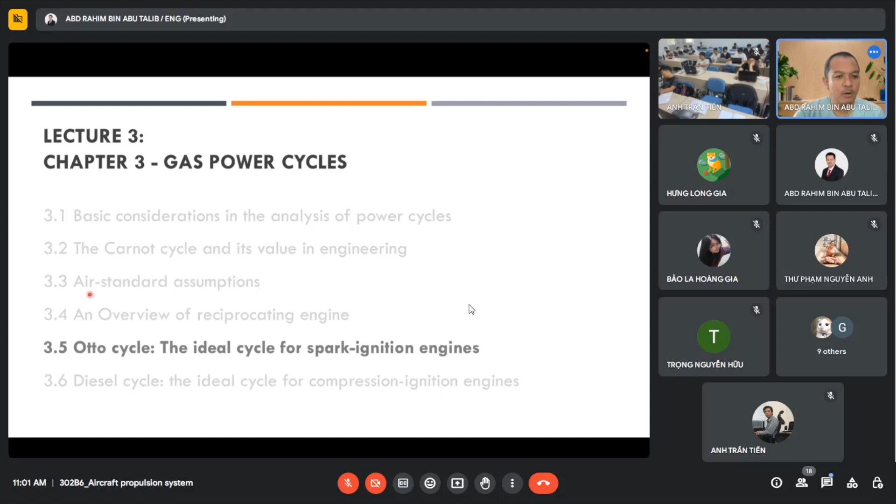In chapter 3, gas power cycles, we have already looked into the topic on analysis of power cycle, and then we looked into the Carnot cycle and its value in engineering. We also continue on air standard assumptions. There are a few assumptions that you need to understand, and I would highly recommend you memorize the standard air assumptions, so that whenever you come across any problems in gas power cycle, you can apply all the air standard assumptions with reasoning.

And before our break just now, we already looked into an overview of the reciprocating engine. From there we learned a few terminologies that are very important for us to apply in the following subtopic. So next we want to go into the Otto cycle. This is the Otto cycle, the ideal cycle for spark ignition engines.

The Otto cycle is the ideal cycle for spark ignition reciprocating engines. It is named after Nikolaus A. Otto, who built a successful four-stroke engine in 1876 in Germany using the cycle proposed by Frenchman Beau de Rochas in 1862.

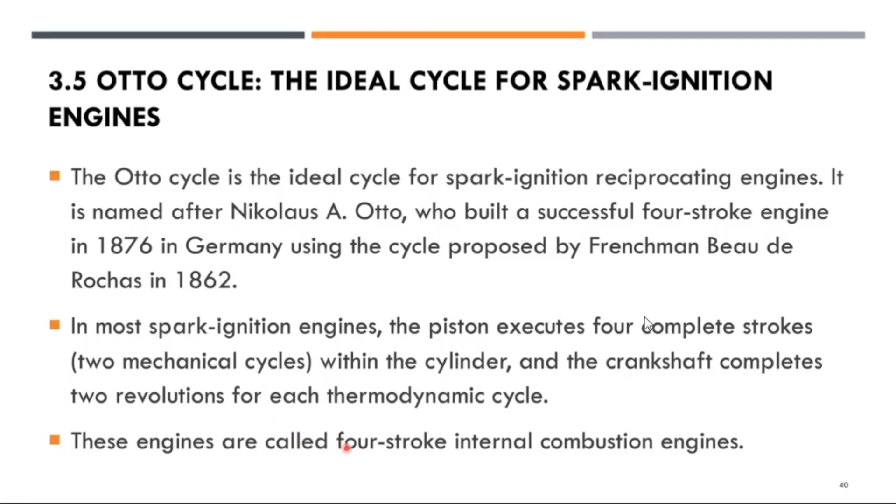This guy, Mr. Rochas, already proposed the cycle in 1862. However, Mr. Otto successfully made it realistic in 1876. Basically, in most spark ignition engines, the piston executes 4 complete strokes, 2 mechanical cycles within the cylinder, and the crankshaft completes 2 revolutions for each thermodynamic cycle. So these engines are called 4-stroke internal combustion engines.

Later on we are going to look into how it looks like. I think it's better we try to understand the process. Initially, both the intake and the exhaust valve are closed, and the piston is at its lowest position, BDC. I think you can recap what BDC is. During the compression stroke, the piston moves upward, compressing the air-fuel mixture.

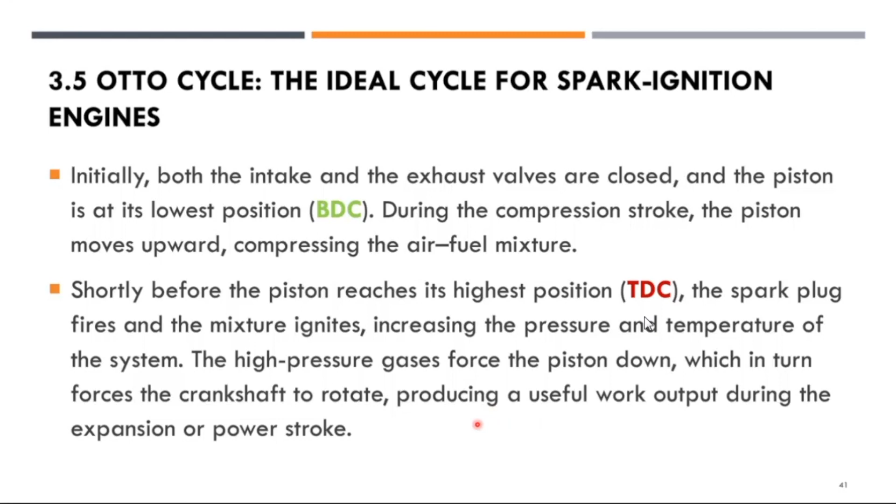Shortly before the piston reaches its highest position, the TDC, the spark plug fires and the mixture ignites, increasing the pressure and temperature of the system. The high pressure gases force the piston down, which in turn causes the crankshaft to rotate, producing useful work output during the expansion or power stroke. So that's what happens in this particular movement, the compression stroke.

The piston moves upward, and then there's a spark there to ignite, right? And then the exhaust stroke movement and the intake stroke movement.

Let us just try to read through. Toward the end of the expansion stroke, the exhaust valve opens and the combustion gases that are above atmospheric pressure rush out of the cylinder through the open exhaust valve on top of the cylinder. This process is called exhaust blowdown, and most combustion gases leave the cylinder by the time the piston reaches BDC, and the cylinder is still filled with exhaust gas at lower pressure at BDC.

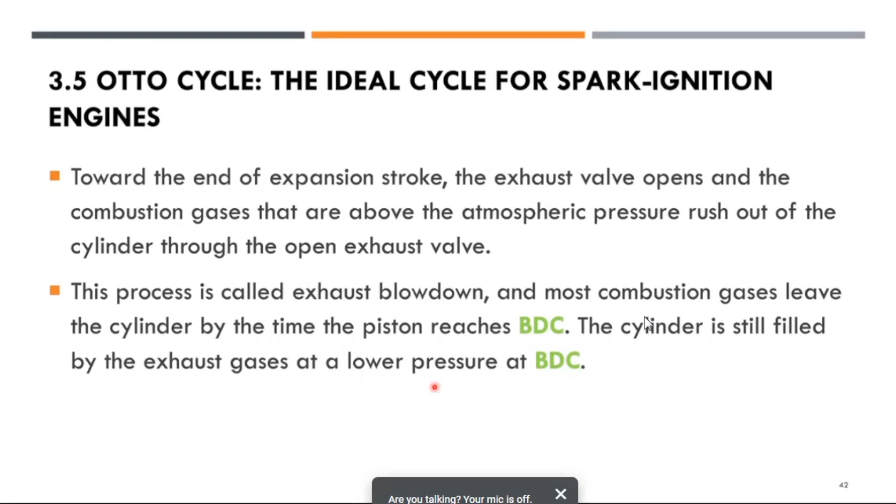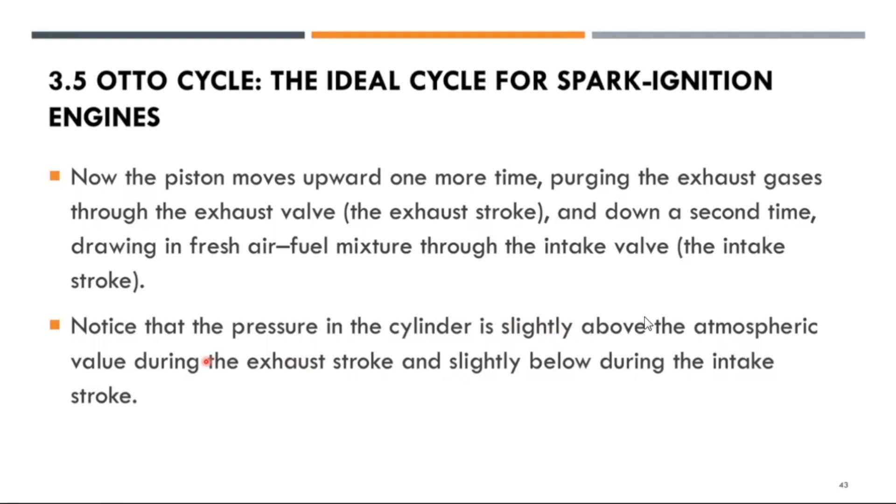Now the piston moves upward one more time, purging the exhaust gas through the exhaust valve, and down a second time, drawing a fresh air-fuel mixture through the intake valve. Notice that the pressure in the cylinder is slightly above the atmospheric value during the exhaust stroke and slightly below during the intake stroke, as shown over here.

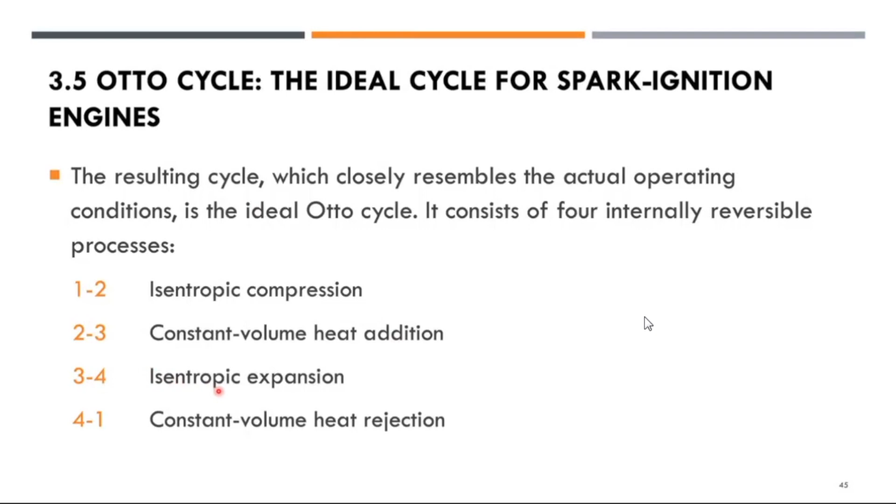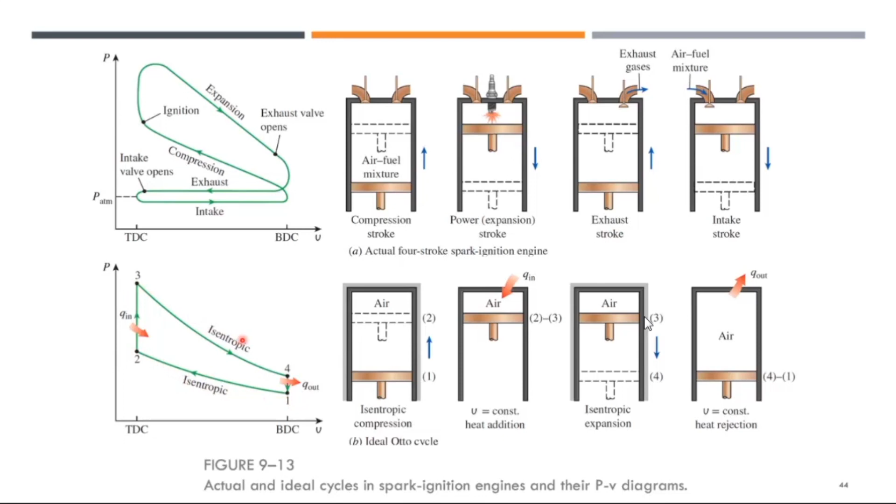The resulting cycle, which closely resembles the actual operating condition, is the ideal Otto cycle. It consists of four internally reversible processes: 1 to 2 is isentropic compression, 2 to 3 is a process of constant volume heat addition, process 3 to 4 is isentropic expansion, and 4 to 1 is constant volume heat rejection. You can see 2 to 3 is Q in, 4 to 1 is Q out. Process 1 to 2 is isentropic compression, 3 to 4 is isentropic expansion.

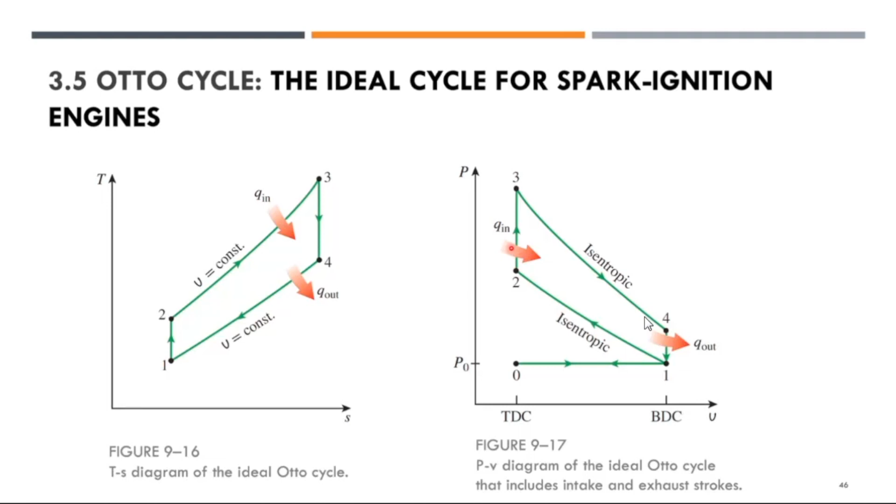This is the TS diagram for the Otto cycle, 1, 2, 3, 4, where the volume is constant for process 2 to 3 and 4 to 1. You can see here for the Otto cycle that includes the intake and exhaust stroke for the PV diagram, process 1, 2, 3, 4, and back to 1. This has already been highlighted in the earlier figure.

We can observe from this particular figure, figure 9-18, the thermal efficiency of the ideal Otto cycle as a function of the compression ratio, with the specific heat ratio k equal to 1.4.

Compression ratio at specific heat ratio of 1.4, this is for air. Compression ratio, the symbol is R. This K is the specific heat ratio.

We can observe that the thermal efficiency curve is rather steep at lower compression ratios. But it flattens out at higher compression ratios, and this is the range of a typical compression ratio for a gasoline engine, about 8. Therefore, the increase in thermal efficiency with compression ratio is not as pronounced at high compression ratio.

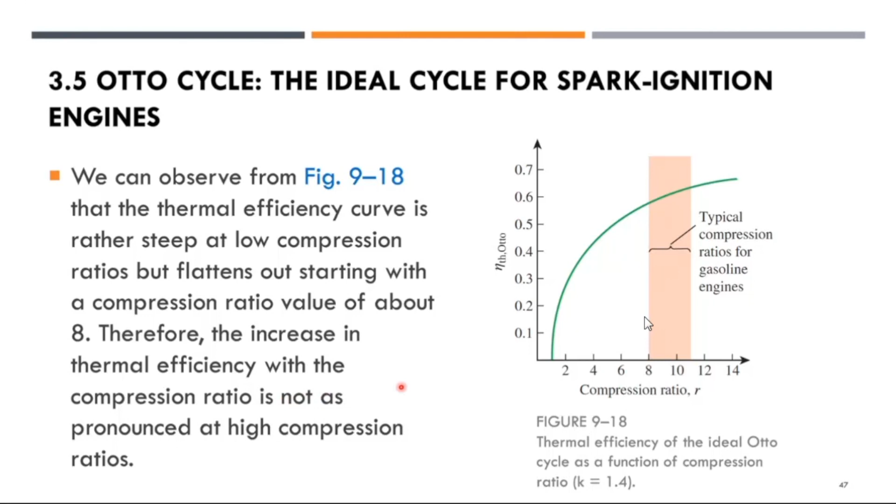The second parameter which affects the thermal efficiency of an ideal Otto cycle is the specific heat ratio, K or gamma. For a given compression ratio, an ideal Otto cycle using a monatomic gas such as argon or helium, at K equal to 1.667, will have the highest thermal efficiency. If you refer back to table A2, you can see the different values of K for different gases.

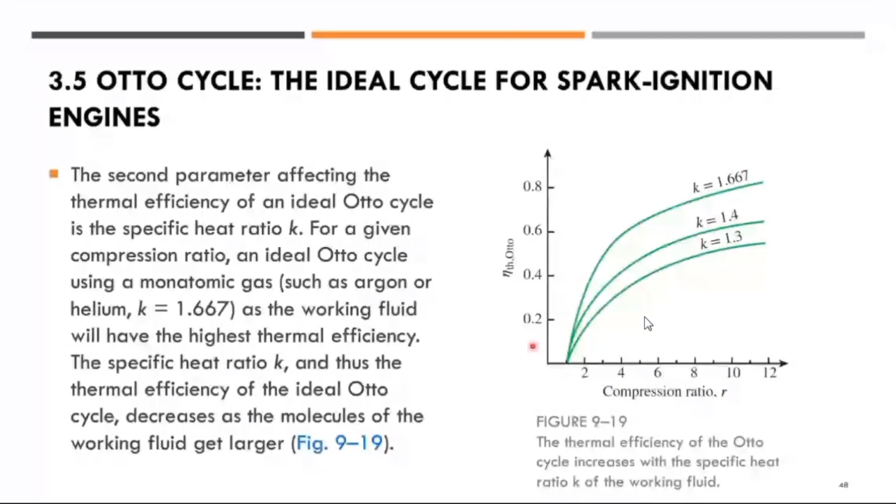The higher the value of the specific heat ratio, the higher the thermal efficiency for the Otto cycle. Thus, the thermal efficiency for an ideal Otto cycle decreases as the molecules of the working fluid get larger. A larger molecule gives you a lower thermal efficiency.

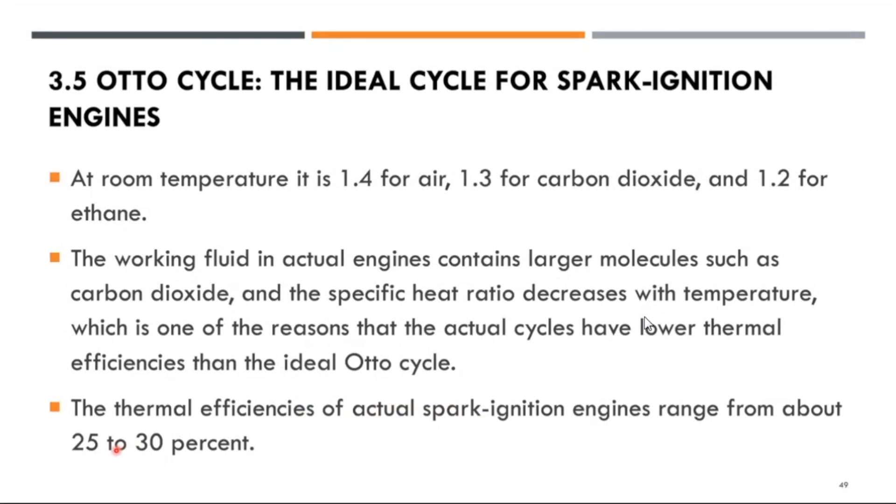At room temperature, the specific heat ratio for air is 1.4, carbon dioxide is 1.3, and ethane is 1.2. The working fluid in actual engines contains larger molecules such as carbon dioxide, and the specific heat ratio decreases with temperature, which is one of the reasons actual cycles have lower thermal efficiencies than the ideal Otto cycle. So the thermal efficiency of actual spark ignition engines ranges from about 25 to 30% only.

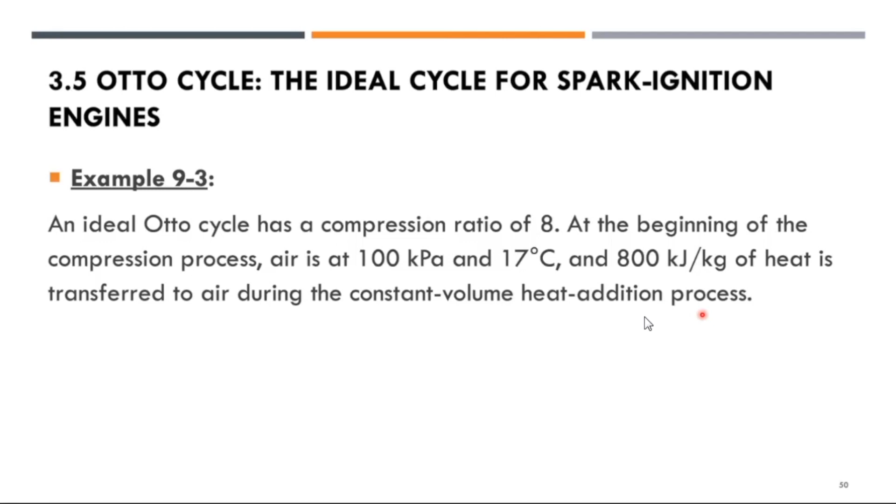Let us look at one example related to the Otto cycle. We have an Otto cycle having a compression ratio of 8. At the beginning of the compression process, air is at 100 kilopascal and 17 degrees Celsius, and 800 kilojoules per kilogram of heat is transferred to the air during the constant volume heat addition process. So those are the conditions.

Accounting for the variation of specific heat of air with temperature, we have to determine the maximum temperature and pressure that occur during the cycle. What is the maximum temperature? Then the net work output, W net, the thermal efficiency eta TH, and the MEP, mean effective pressure, for the cycle.

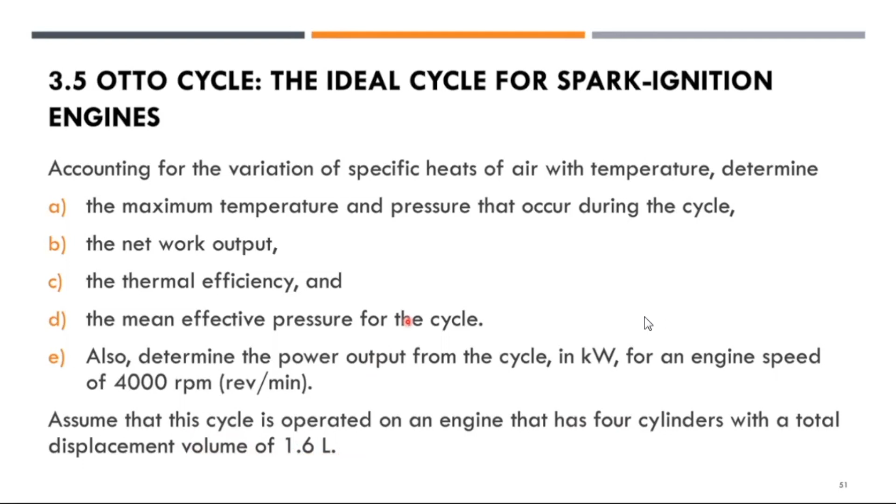You also have to determine the power output from the cycle in kilowatts for an engine speed of 4,000 RPM. Assume this cycle is operated on an engine that has 4 cylinders with a total displacement volume of 1.6 liters. So you'll be given all the information needed to come up with the answers.

For the solution, an ideal Otto cycle is considered. The maximum temperature and pressure, the net work output, the thermal efficiency, the mean effective pressure, and the power output for a given engine speed are to be determined.

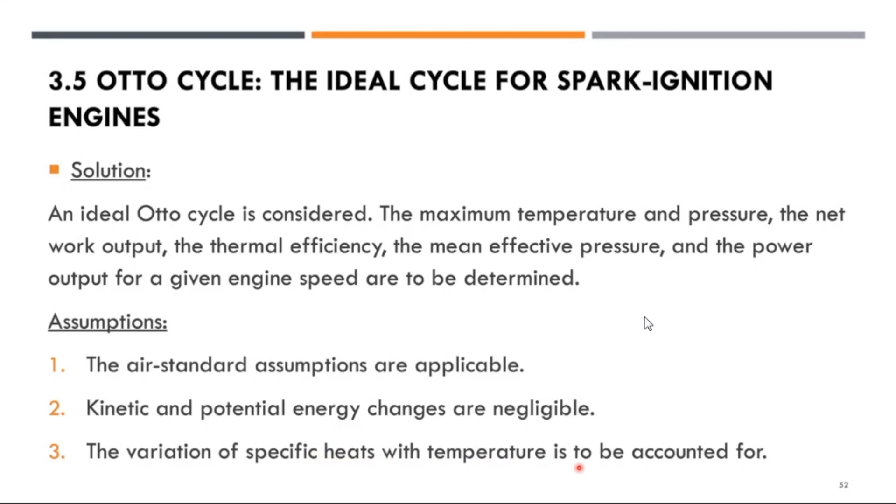What are the assumptions? Number one, the air standard assumptions are applicable - this is the standard answer. Second, kinetic and potential energy changes are negligible. Third, variation of specific heat with temperature is to be accounted for, so the value of K in this particular case has to be accounted for in order to answer the question.

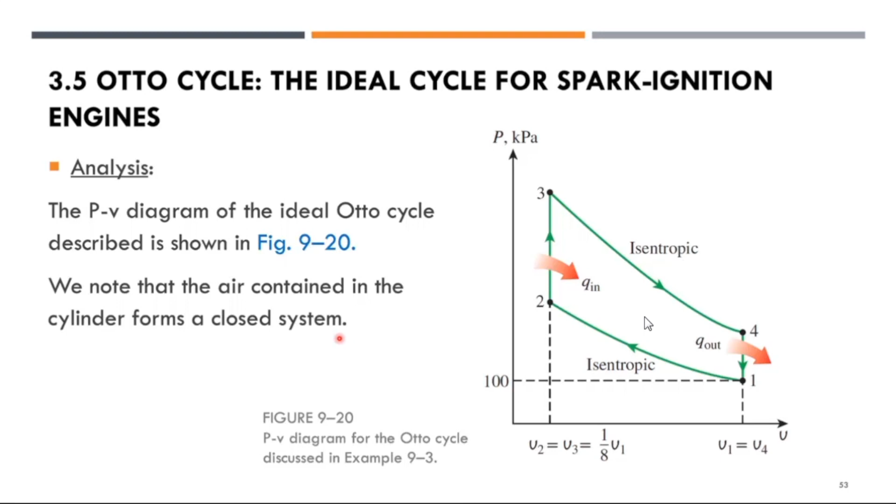Maximum temperature and pressure in the Otto cycle occur at the end of the constant volume heat addition process, at state number 3. But first we need to determine the temperature and pressure of air at the end of the isentropic compression, at state number 2, using data from table A17.

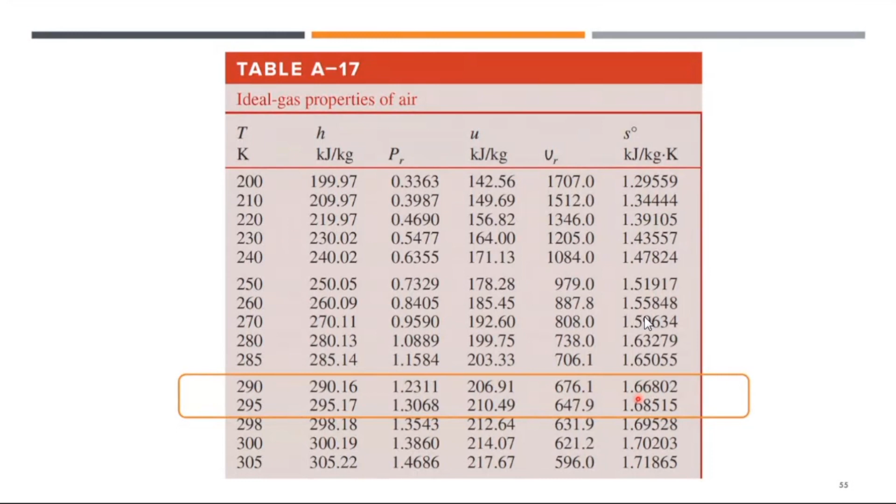The next slide has a snapshot of table A17 from the thermodynamics book. We have the information of T1, 290 Kelvin. We need to read the value of internal energy U1 and VR1. From table A17, ideal gas properties of air, knowing the temperature at 290 Kelvin, you have the value of the enthalpy, the relative pressure PR, the internal energy, the VR, and the S value. So you can then get the corresponding values out.

For process 1 to 2, isentropic compression of an ideal gas, we want to find the compression ratio R which is 8 in this particular case. We know VR1 is 676.1 at 290 Kelvin, then you have the value for VR2 is 84.51.

From there you can get the corresponding value of T2 from the table: 652.4 Kelvin, and internal energy 475.11 kilojoule per kilogram using the same table. Input into the equation PV over T for states 1 and 2, you can then rearrange it to get the value of pressure at station 2, which corresponds to 1799.7 kilopascal.

Continuing to process 2 to 3, constant volume heat addition. You know Q in equals U3 minus U2. You already have the value of Q in, and you need to find the value of U3.

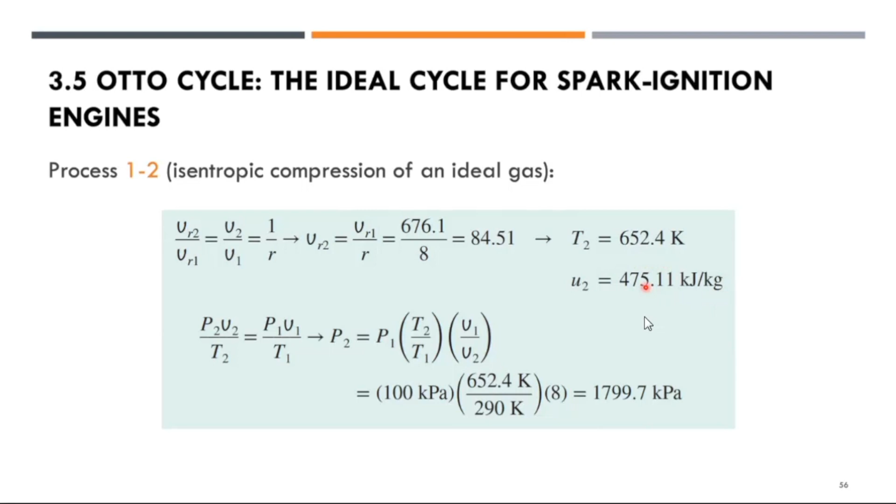You already know the value of U2 from the previous answer. If you get that wrong, you will also get U3 wrong. So that's where you can then read U3 as 1275.11 kilojoule per kilogram from the table.

You read back what is the corresponding value for the temperature and the value of VR3. Using the same approach, you can then get the pressure at station 3, which corresponds to 4.345 megapascal.

For section B, the net work output for the cycle is determined either by finding the boundary pressure times change of volume dV, the work involved in each process by integration and adding them, or by finding the net heat transfer that is equivalent to the net work done during the cycle. We take the second, latter approach.

We want to find the net work done. However, first we need to find the internal energy of air at state 4. Process 3 to 4, we know it is an isentropic expansion of an ideal gas.

So we apply the same condition, where we know R equals 8, and you can get the value of VR4, which is 48.864. You read from the table T4 corresponds to 795.6 Kelvin, and U4 internal energy equals 588.74 kilojoule per kilogram.

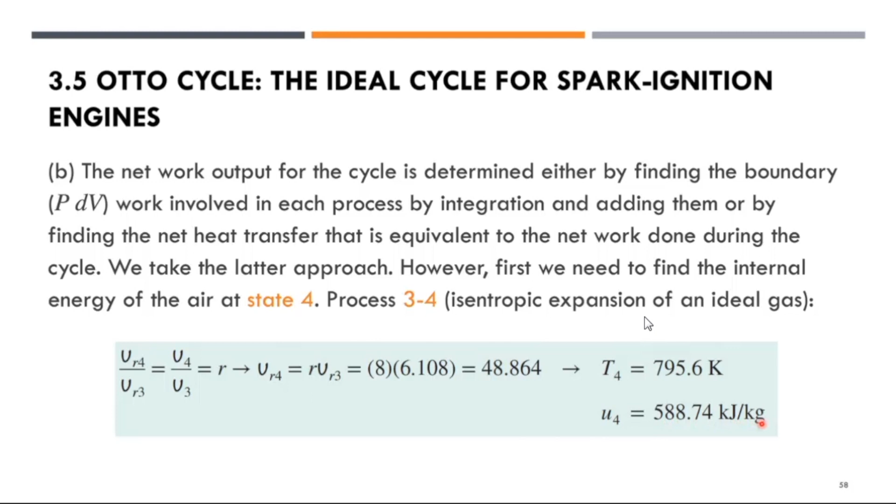Process 4 to 1, constant volume heat rejection. So you know the value of U1, and you already know the value of U4, then you can get the rejected heat as 381.83 kilojoule per kilogram.

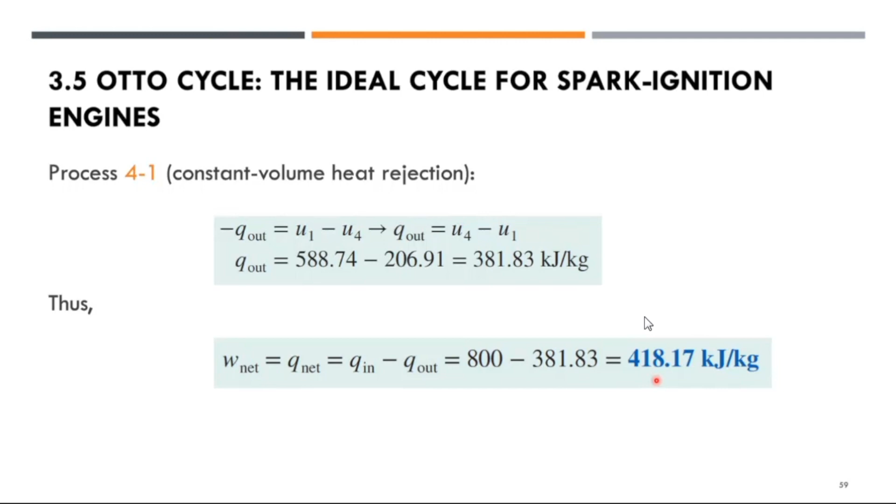From there you can get the work done, and the net work done which is equal to the net output, the net heat input, which is Q in minus Q out, equal to 418.17 kilojoule per kilogram. Thermal efficiency from there, W net over Q in, you get 52.3%.

All of this is the ability to read from table A17, going from one process to another process to another process. So I would strongly suggest for you to go through this example again and try to make sense of the steps and answers obtained.

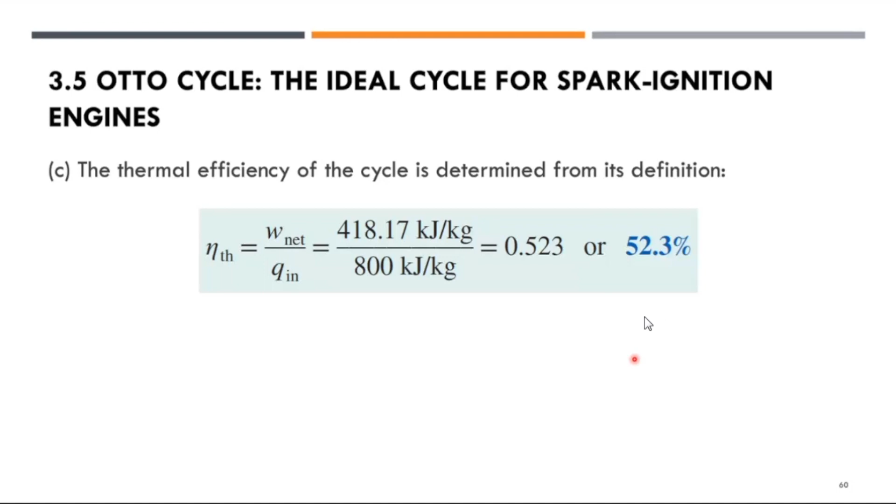Under the cold air standard assumptions, with constant specific heat values at room temperature, the thermal efficiency would be from equation for the Otto cycle. So you put in the numbers and you will get it to be 56.5%, which is considerably different from the value obtained earlier. We have 52.3%, but over here we have 56.5% for the thermal efficiency for the Otto cycle.

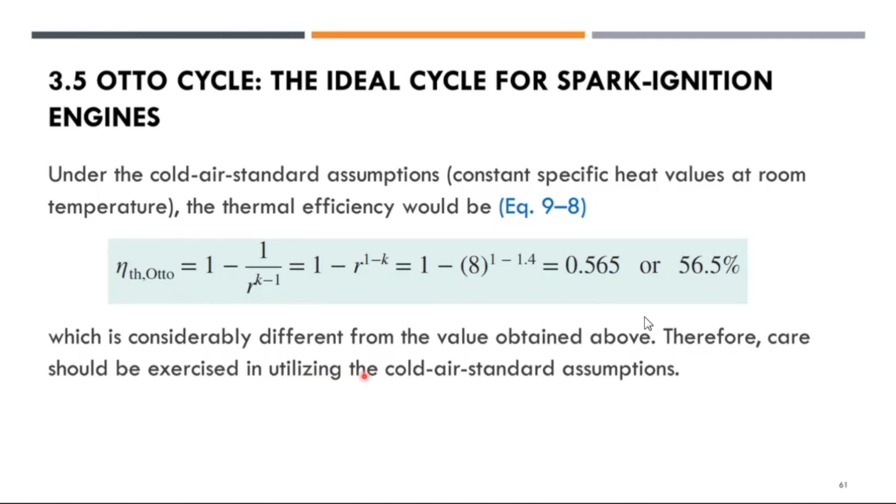Therefore, care should be exercised in utilizing the cold air standard assumptions.

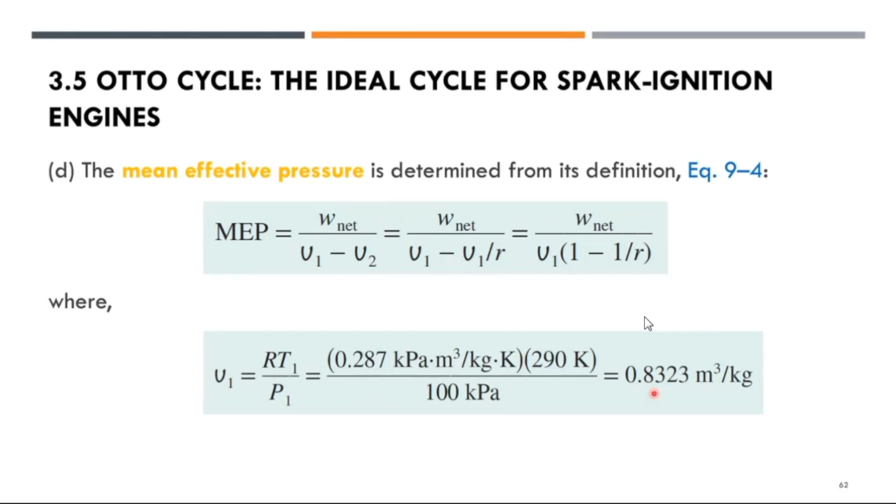For the mean effective pressure, which is determined from the MEP equation, you can then put in the values, V1 equal to RT1 over P1. You have all the values already, and you get V1 equal to 0.8323 meter cubic per kilogram.

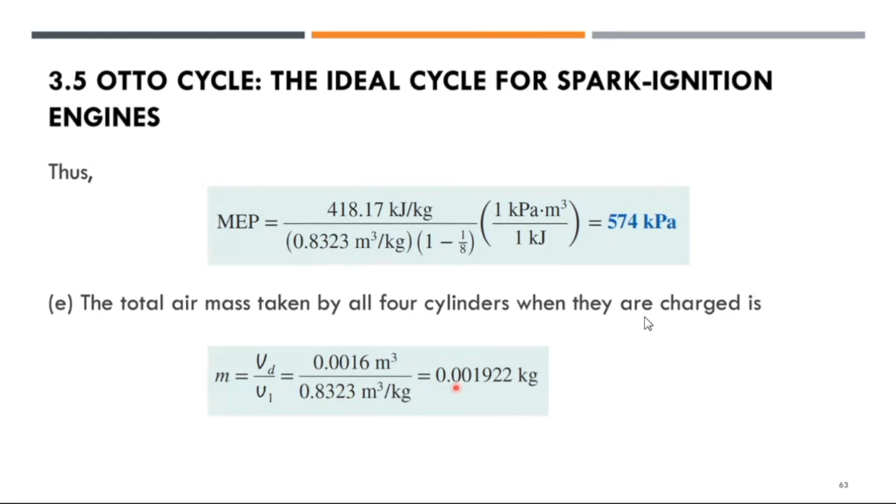Thus for the MEP itself you get 574 kilopascal, and the total air mass taken by all 4 cylinders when they are charged is the mass equal to VD over V1, and you have the volume for the cylinders divided by V1 equal to 0.00192 kilogram. The net work produced by the cycle can then be calculated.

We have already found earlier the net work of 418.17. You times the mass, and you will get the total net work for the cycle.

So that is the net work produced per thermodynamic cycle: 0.8037 kilojoule per cycle, noting that there are 2 revolutions per thermodynamic cycle.

In a 4-stroke engine, or the ideal Otto cycle, including intake and exhaust stroke, the power produced is basically W net times N, the revolution per minute, divided by the number of revolutions per cycle. Then you get the power of the engine equal to 26.8 kilowatt.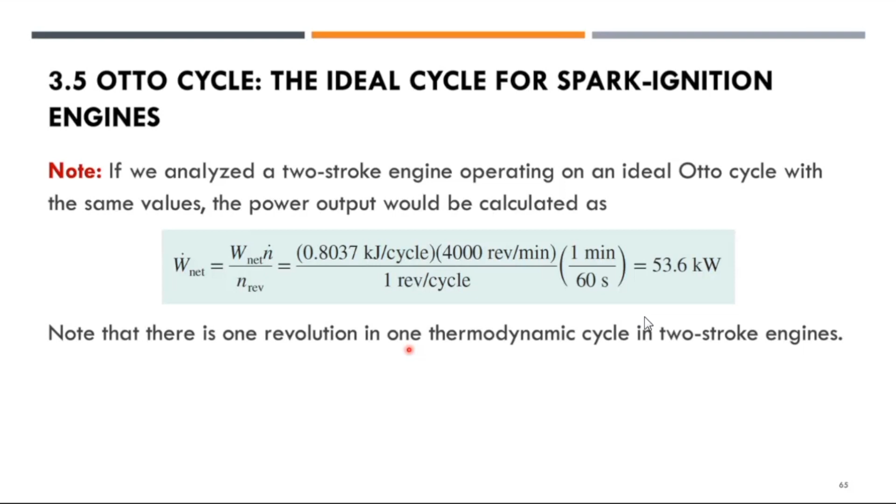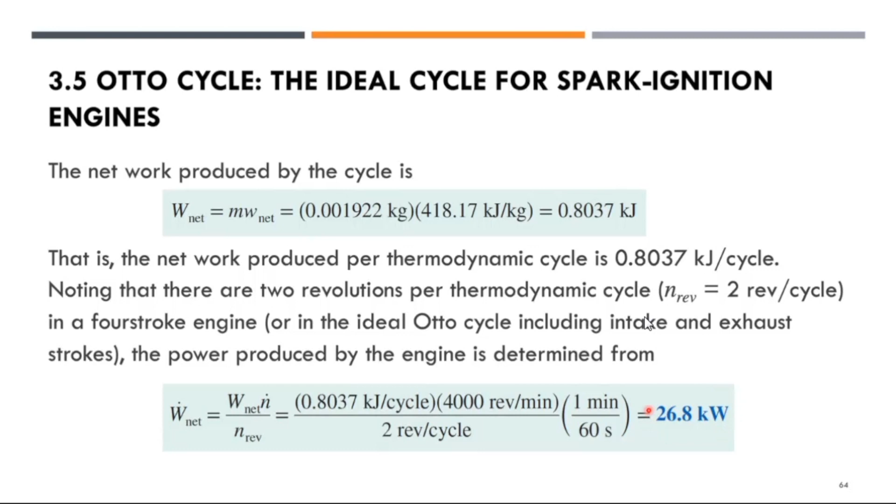Note, if you analyze a 2-stroke engine operating on the ideal Otto cycle with the same values, the power output would be calculated as follows: we get 53.6 kilowatt, and this is 1 revolution per thermodynamic cycle for the 2-stroke. For the previous one we took 2 revolutions per thermodynamic cycle, because in a 4-stroke engine we have 2 revolutions per cycle. That's why the value is half of the one obtained over here.

So the last part of the session today is looking into another type of cycle, which is the diesel cycle, the ideal cycle for the compression ignition engine.

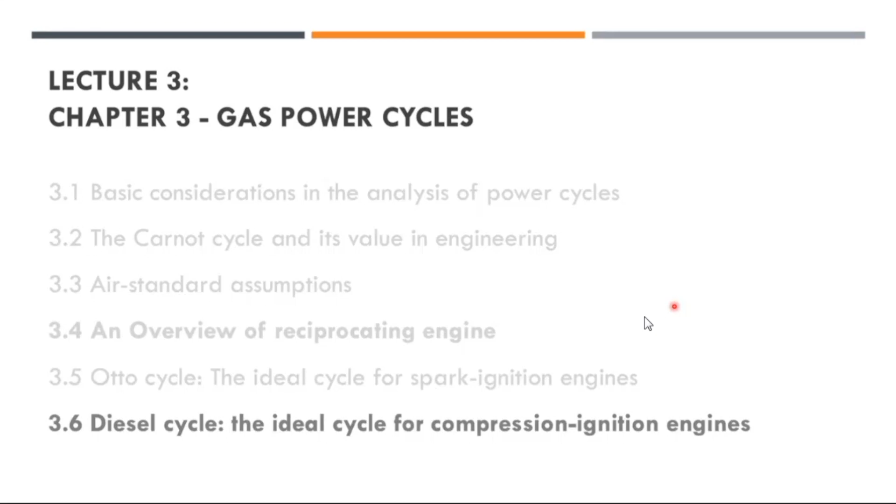In a compression ignition engine, also known as a diesel engine, the air is compressed to a temperature above the auto-ignition temperature of the fuel, and combustion starts on contact as the fuel is injected into this hot air, forming the air-fuel mixture. For a gasoline engine, we have a spark plug. For a diesel engine, we have a fuel injector which injects fuel into the air, forming the air-fuel mixture. So the spark plug is replaced by a fuel injector for the diesel engine.

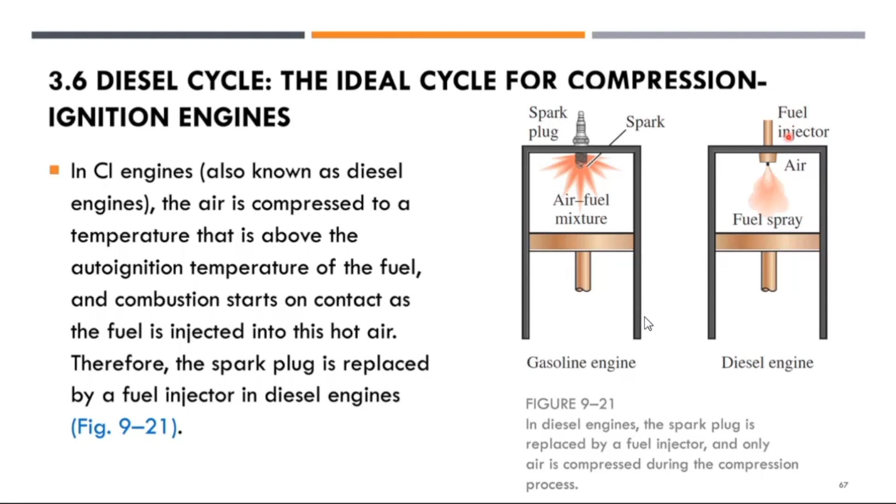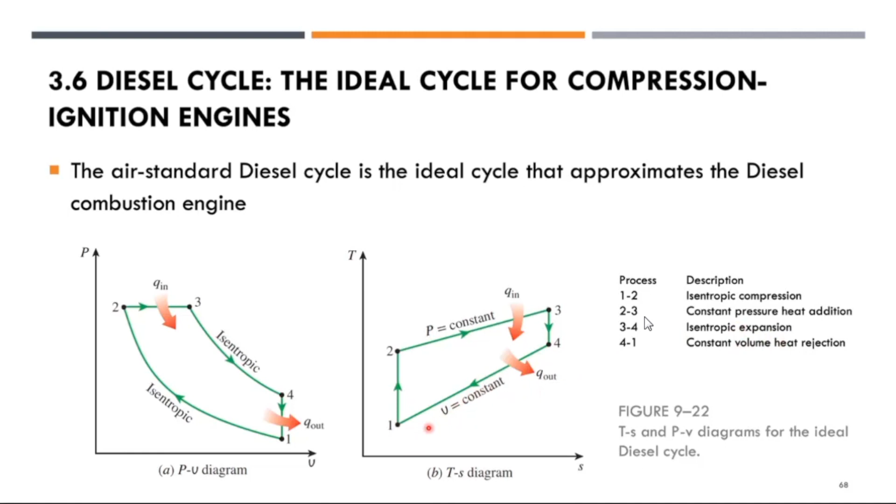The air standard diesel cycle is the ideal cycle that approximates the diesel combustion engine, so we also have the PV diagram and the TS diagram for it. Process 1 to 2 is isentropic compression; 2 to 3 is constant pressure heat addition; 3 to 4 is isentropic expansion; and finally 4 to 1 is constant volume heat rejection, where V is constant.

What is the thermal efficiency for a diesel cycle? Eta TH diesel equals the net work done divided by the total amount of heat into the system, equal to 1 minus Q out over Q in. So now, to find Q in and Q out, we have to apply the first law for a closed system to process 2-3, where the pressure is constant.

The energy into the system minus the energy out equals the total change in energy. Then you can write Q net for 2-3 minus the net work done by 2-3 equals the change in internal energy from process 2 to 3, which simplifies to pressure times the volume difference between 3 and 2. Remember, from 2 to 3 pressure is constant but volume is not.

Thus, for constant specific heat Cp, you can rewrite Q net 2-3 as delta U from 2 to 3 plus pressure at 2 times the volume difference between 3 and 2, then replace it using M Cv times the temperature difference plus MR times the temperature difference. So you simplify it as the amount of heat into the system at 2-3 equal to mass times the specific heat capacity at constant pressure times the temperature difference between 3 and 2.

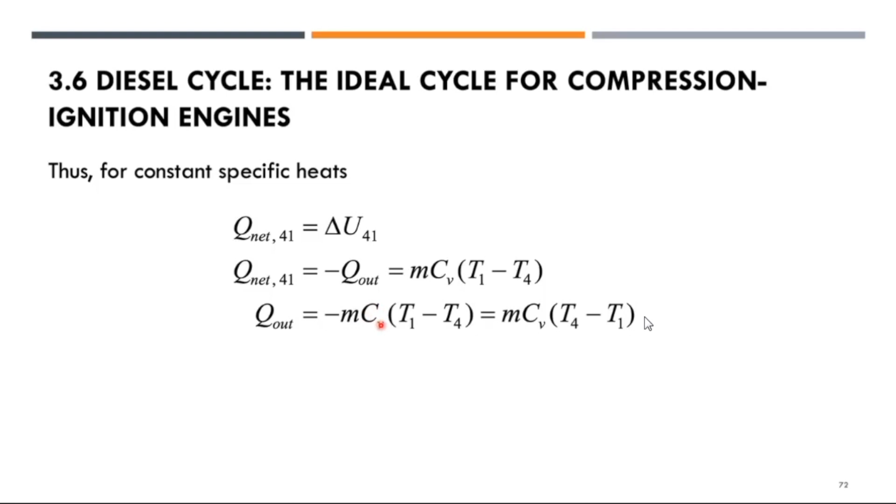Thus, for constant specific heat, you rewrite the same approach for Q out, now in terms of constant volume instead of constant pressure. The thermal efficiency finally becomes eta TH diesel, and you can rearrange this until you get the value of this expression: eta TH diesel equal to 1 minus 1 over K, where K is the specific heat ratio.

And then you have all the values to be included.

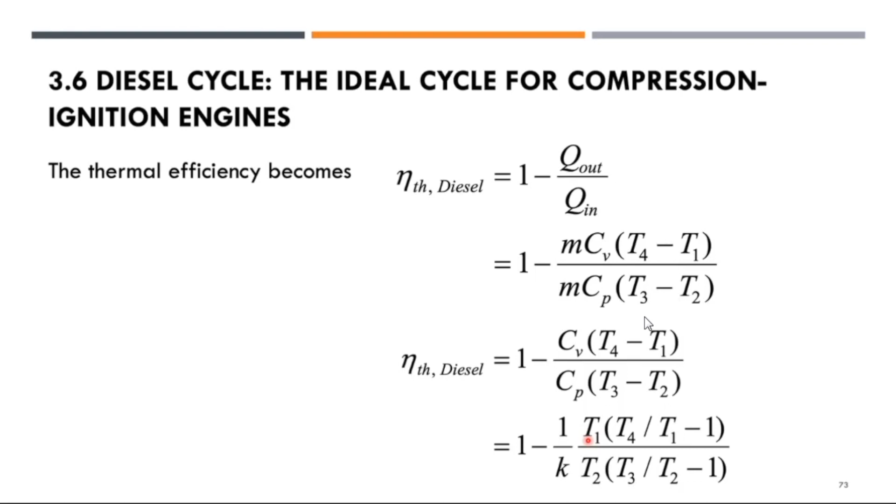To continue, for volume, P3 times V3 over T3 equal to P2 times V2 over T2, where we know at constant pressure P3 equal to P2. So we have another terminology here: the cut-off ratio, RC, defined as V3 over V2, volume at 3 over volume at 2.

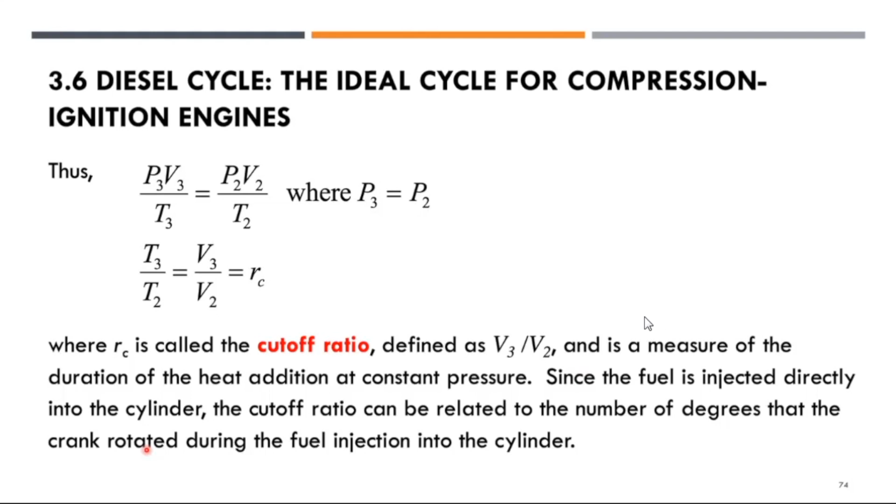This is a measure of the duration of heat addition at constant pressure. Since the fuel is injected directly into the cylinder, the cut-off ratio can be related to the number of degrees that the crank will turn during the fuel injection into the cylinder.

Thus, P4 over T4 equal to P1 V1 over T1 for the process 4 to 1, where now the volume is the same, V4 equal to V1. You can rearrange that, cancel out V4 and V1, so you get T4 over T1 equal to P4 over P1.

We recall the processes 1-2 and 3-4 are isentropic. So P1 V1 to the power of the specific heat ratio equal to P2 V2 to the power of specific heat ratio K, and the same for 4 and 3.

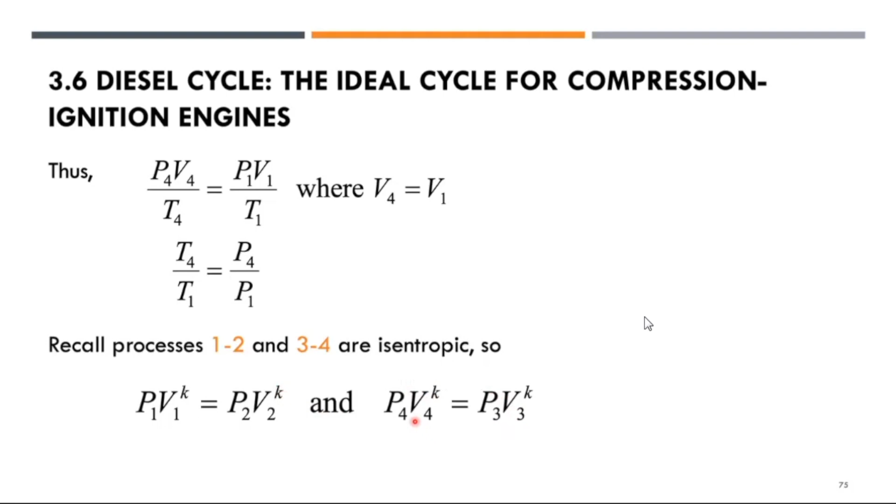So we know V4 equal to V1 and P3 equal to P2. We divide the second equation by the first equation and obtain this expression of the cut-off ratio.

Therefore, the thermal efficiency for the diesel engine can be rewritten as a function of the specific heat ratio and the cut-off ratio for the system.

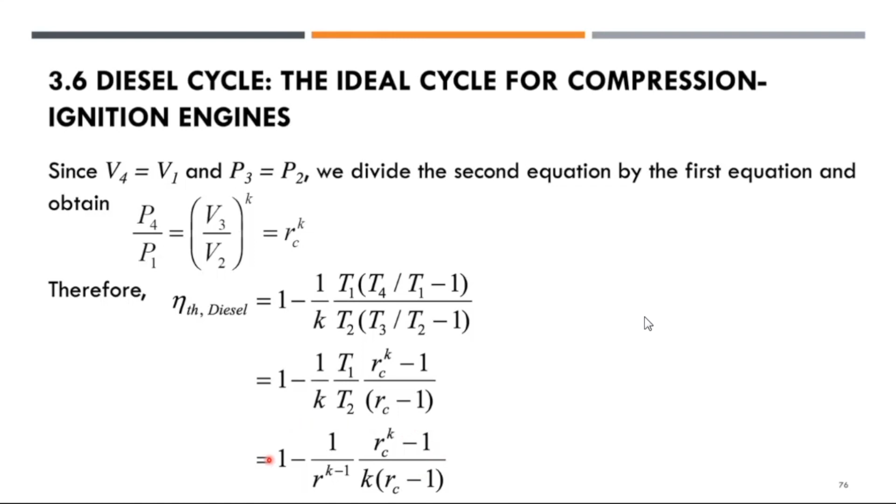In a situation when the cut-off ratio is more than 1 for a fixed compression ratio R, the thermal efficiency for the diesel is less than the thermal efficiency for the Otto cycle. However, since the R for diesel is more than R for the Otto cycle, the thermal efficiency for the diesel will be greater than the thermal efficiency of the Otto cycle.

This figure 9-23 shows the thermal efficiency of the ideal diesel cycle as a function of the compression ratio R as well as the cut-off ratio RC, as given in this particular graph.

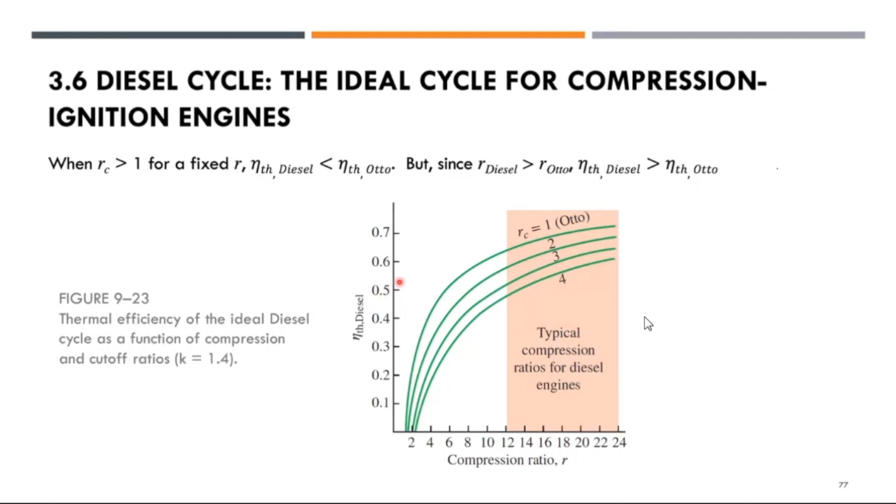Let us look into one example. Bear in mind, this example uses the English unit. Somehow in this particular textbook, they provide an English unit, so I did not have time to change it into the SI unit. Let us go through this.

An ideal diesel cycle with air as the working fluid has a compression ratio of 18, so compression ratio R is equal to 18, and a cut-off ratio of 2, so RC equal to 2. At the beginning of the compression process, the working fluid is given at 14.7 PSIA at a temperature of 80 degrees Fahrenheit and a volume of 117 cubic inches.

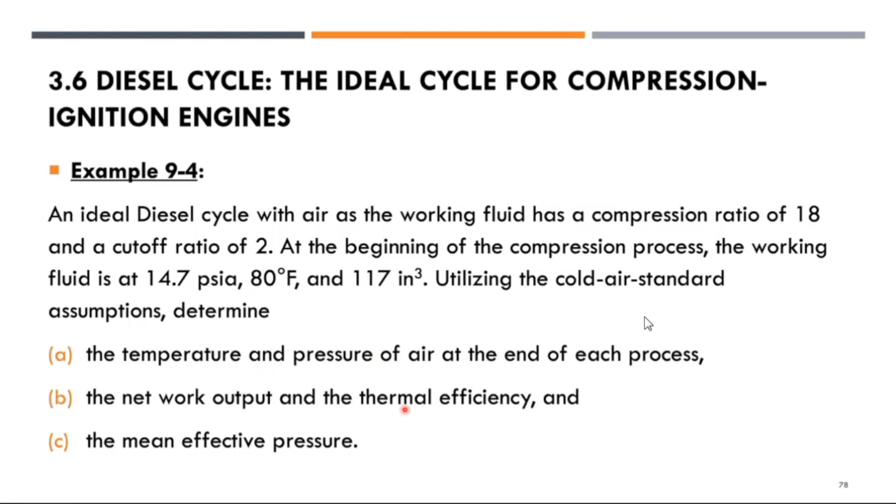Utilizing the cold air standard assumption, determine the temperature and pressure of air at the end of each process, the net work output and the thermal efficiency, and finally the MEP, mean effective pressure.

As a solution, an ideal cycle is considered. The temperature and pressure at the end of each process, the net work output, the thermal efficiency, and the mean effective pressure are to be determined.

We can assume that the cold air standard assumptions are applicable, and thus air is assumed to have constant specific heat at room temperature. Of course, kinetic and potential energy changes are negligible in this example.

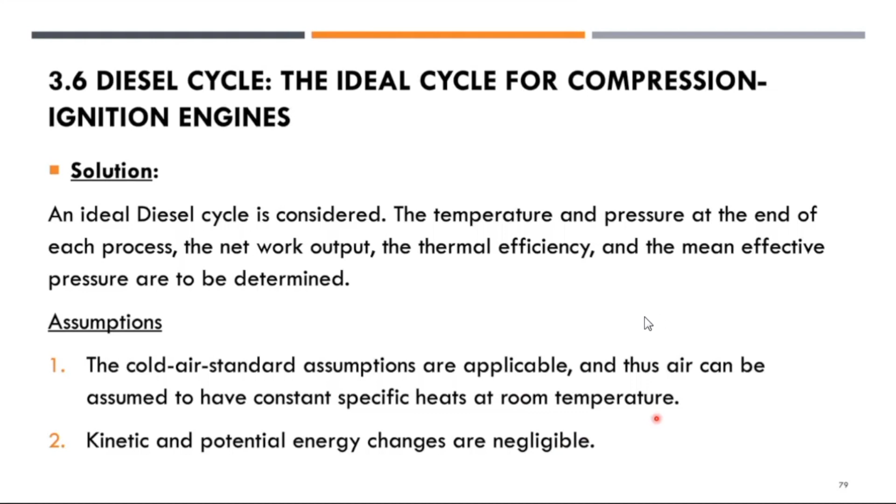Properties of air are taken from table A2EA. A2A is the SI unit, A2EA is the English unit. Somehow this example is given in English units. The gas constant of air given here is 0.3704 PSIA cubic feet over pound mass Rankine, the temperature, and other properties at room temperature are given as follows, taken from this table A2EA.

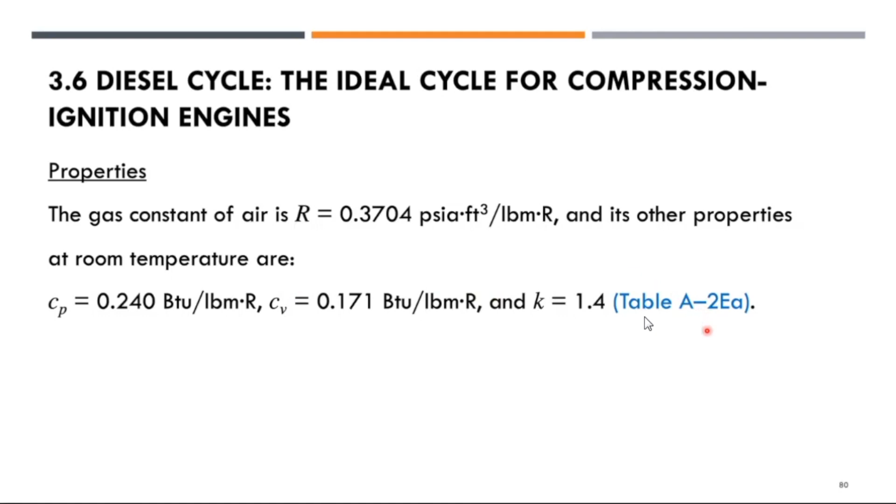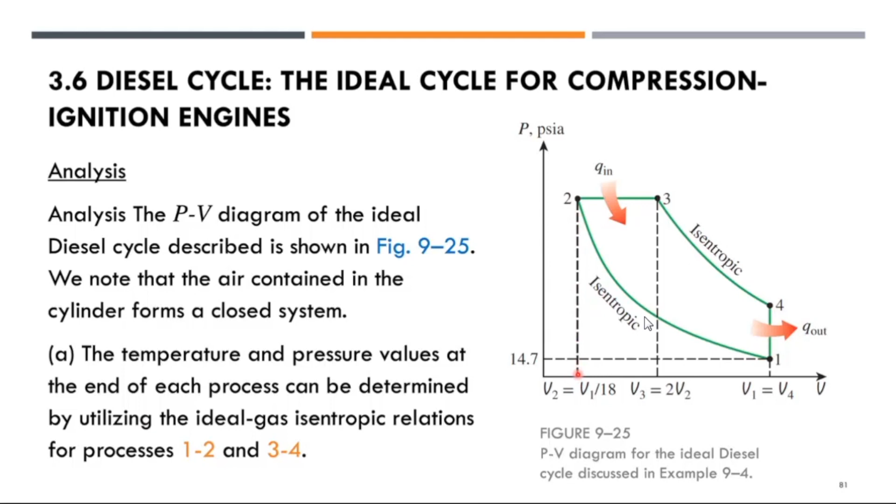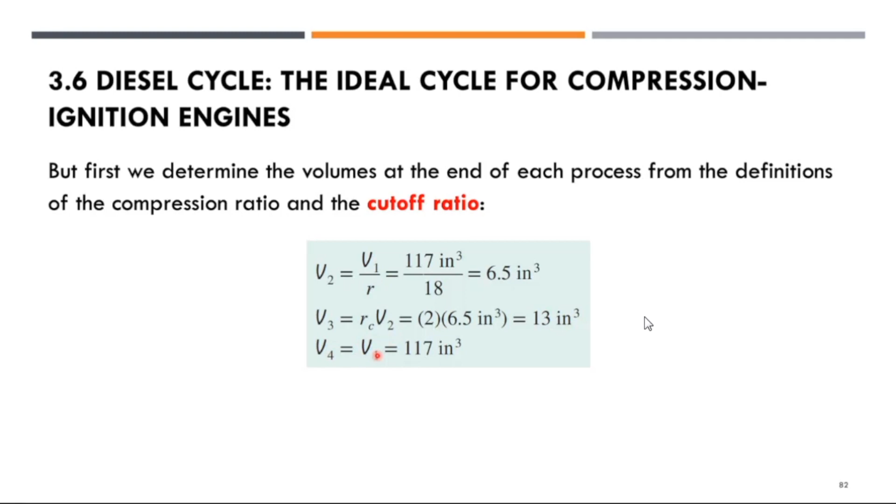We need to first determine the volume at each end of each process from the definition of the compression ratio and the cut-off ratio. So we know V2: R equals V1 over V2. Rearrange that and you get the V2 value. And RC equals V3 over V2. Rearrange that and you get V3 equal to 13 cubic inch, and V4 equal to V1 equal to 117 cubic inch.

For process 1 to 2, isentropic compression of an ideal gas with constant specific heat. This is the expression for isentropic compression of an ideal gas, just with values in English units this time. So you get the value for temperature T2, and the pressure at the corresponding station, station number 2.

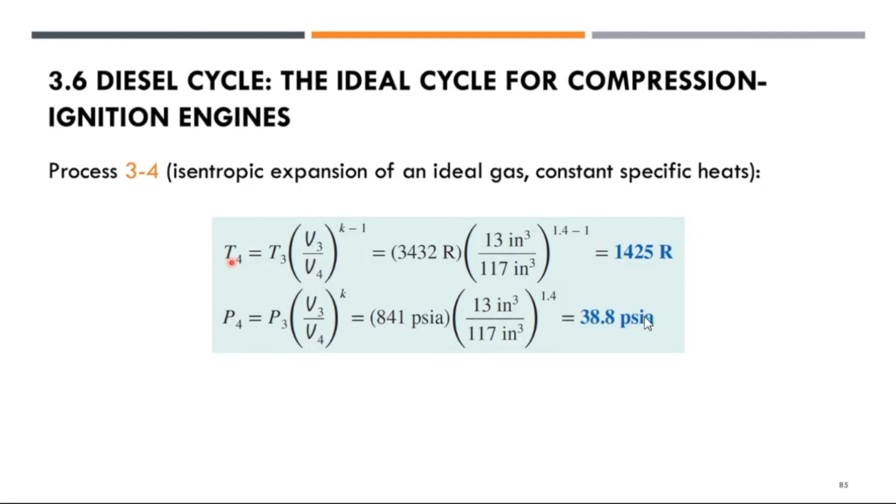For process 3-4, isentropic expansion of an ideal gas at constant specific heat, the same formula being used for 1 to 2. Now you can apply it, 1 to 2, apply it for 3 to 4 expansion, and you will get the value for T4 and P4.

Then the net work for the cycle is equivalent to the net heat transfer, so you can rewrite and find the value for the mass of air first. P equals PV equals MRT, so you can rearrange to get the M value, which is...

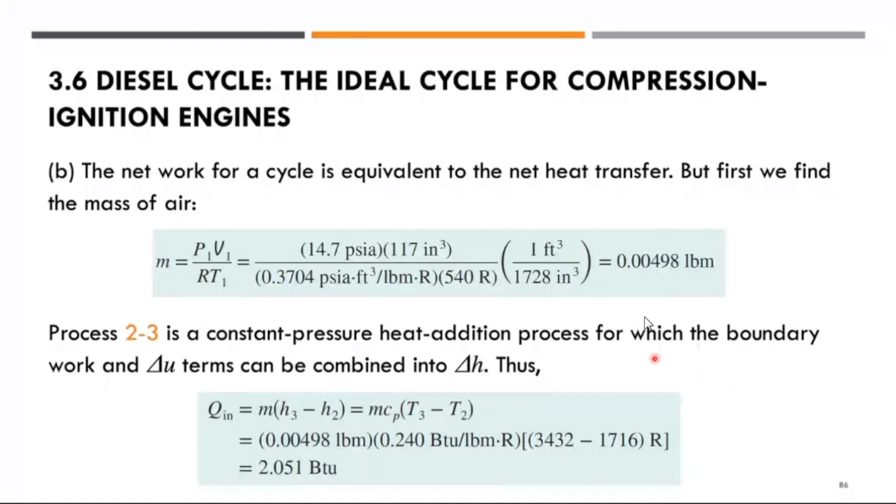0.00498 pound. Process 2-3 is a constant pressure heat addition process for which the boundary work and change in internal energy terms can be combined into change in enthalpy. So that's where you get the Q in equal to 2.051 BTU. I'm not really familiar with the English unit, but you can actually convert it back into the SI unit.

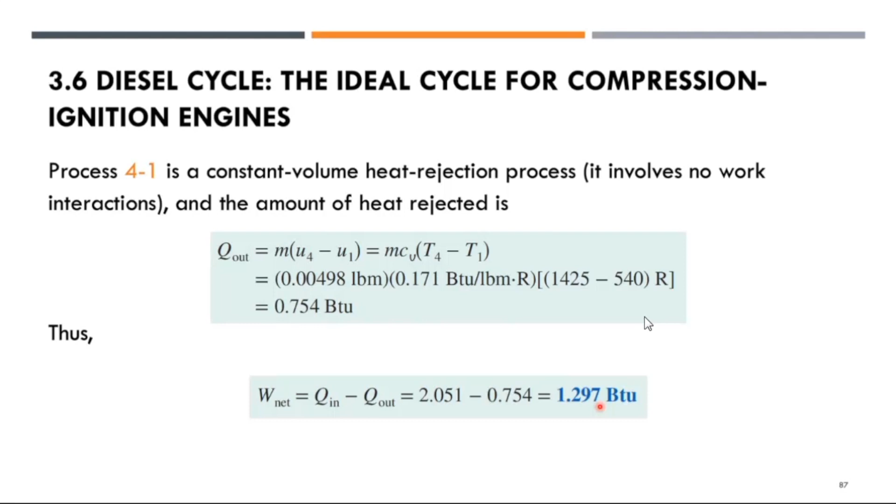Process 4-1 is a constant volume heat rejection. It involves no work interaction, and the amount of heat rejected is as follows. Earlier we got the Q in, now we get the Q out, so we can get the net work in from the system, which is equal to 1.297 BTU.

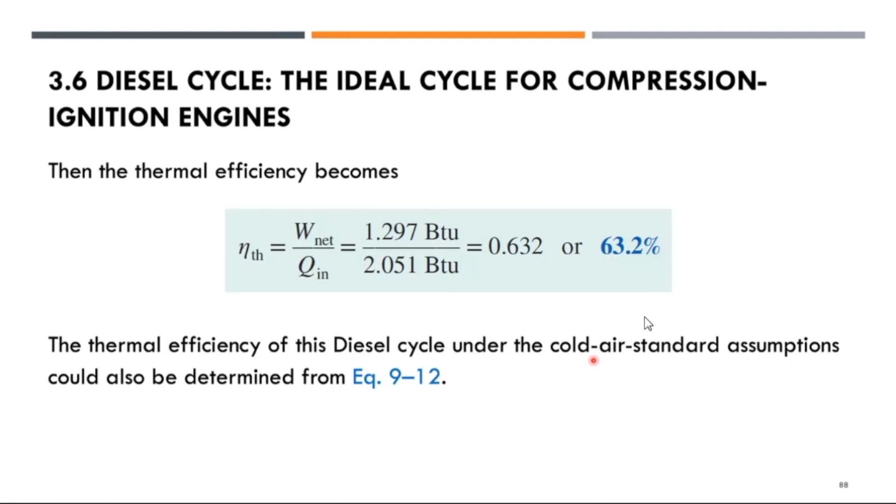So finally, you will get the thermal efficiency, which becomes 63.2%. The thermal efficiency for diesel under cold air standard assumption could also be determined from equation 9-12, which gives you the same expression. For the MEP, mean effective pressure, from equation 9-4, you get 110 psia.

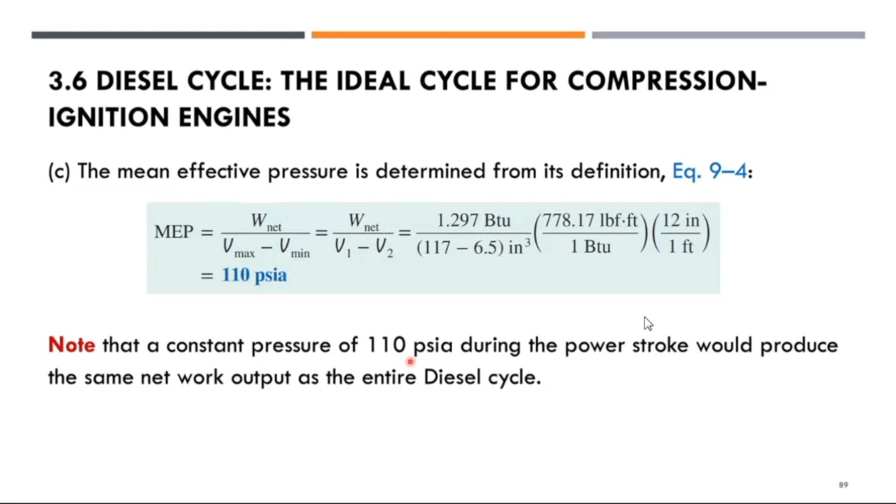Note that a constant pressure of 110 psia during the power stroke would produce the same net work output as the entire diesel cycle. Okay, so that's what we have for today.

We have already looked into 3.1 until 3.6. We shall continue for the remaining topic on gas power cycle, which includes the Stirling and Ericsson cycle, another two types of cycle that are very relevant before we jump into the Brayton cycle for gas turbine engine.

This is from 3.8 onwards, more applicable to our aircraft propulsion subject. The previous topic from 3.1 until 3.7 is just to understand the fundamentals and basis of gas power cycle before we move into the jet propulsion cycle.

So we will continue on Monday to cover the topic on Stirling and Ericsson cycle, Brayton cycle with regeneration, and then Brayton cycle with intercooling, reheating, and regeneration. Finally, we'll also look into the ideal jet propulsion cycle before we complete our gas power cycle topic with the subtopic on second law analysis of gas power cycle.

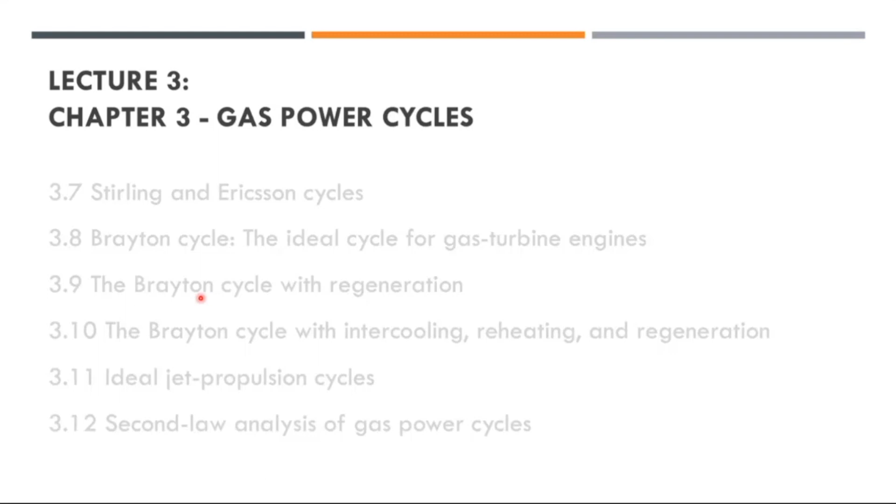The process of going from stage 1 to 2, 2 to 3, 3 to 4, and 4 to 1, and how to read the values from the corresponding table. It's not that much, it's just in terms of familiarity. When you go through it again, probably you will get more insights into where the numbers are coming from. Okay, so thank you for your attention.